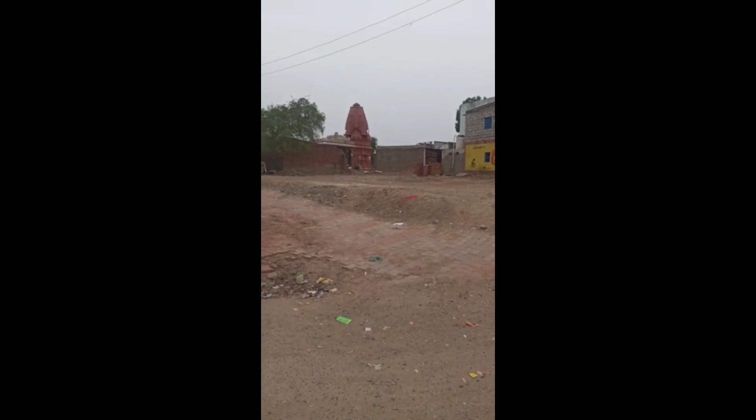We took a session for awareness about cleanliness, attracting tourism, development in the village, and also made girls aware about further education and employment.

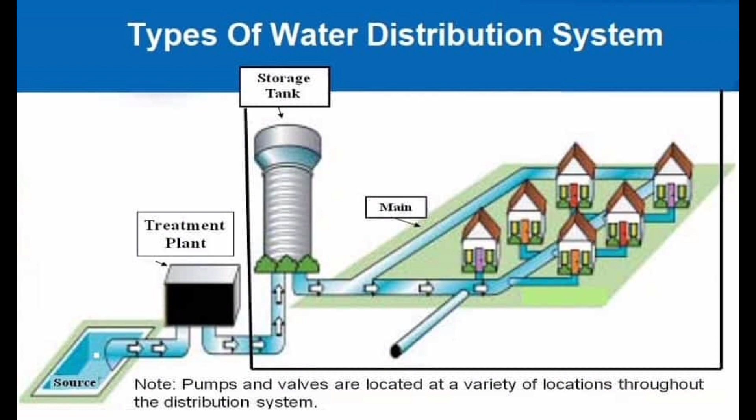Kerala needs a Wi-Fi tower for IT connectivity, speakers for better communication, and CCTV cameras for better surveillance in the village. The village needs a water distribution system since there is already an overhead water tank, and a drainage system, as villagers currently drain wastewater into the lake.

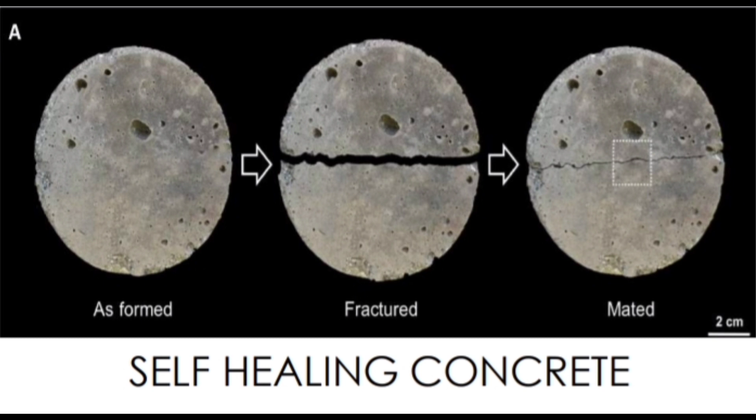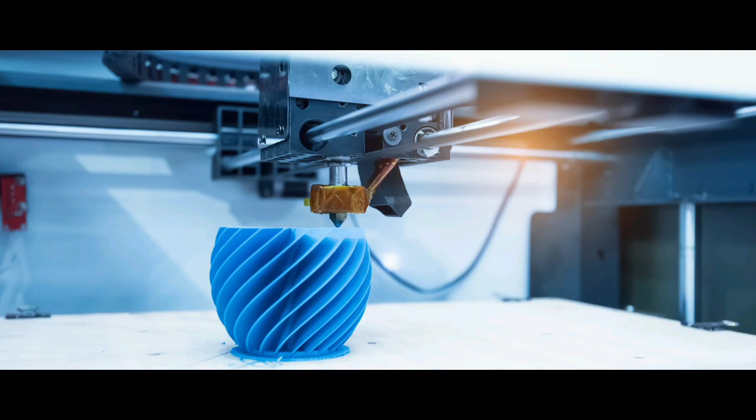Self-healing concrete for self-maintenance of structures, lake water to cool buildings by cutting 80% electricity consumption and CO2 emission, cold storage to extend food life for global food security and economic stability, and a plastic 3D printing machine to reuse plastic in a better way and cut down pollution.

Combining wind and solar energy to generate 40% more energy than ordinary rooftop panels.

We proposed a Gram Panchayat and community hall in the same building. We gave a separate room for Talati and Sarpanch, a computer room, storeroom, 2 toilets and waiting area in the Gram Panchayat, whereas we gave 2 rooms in the community hall, a common toilet and wash basin.

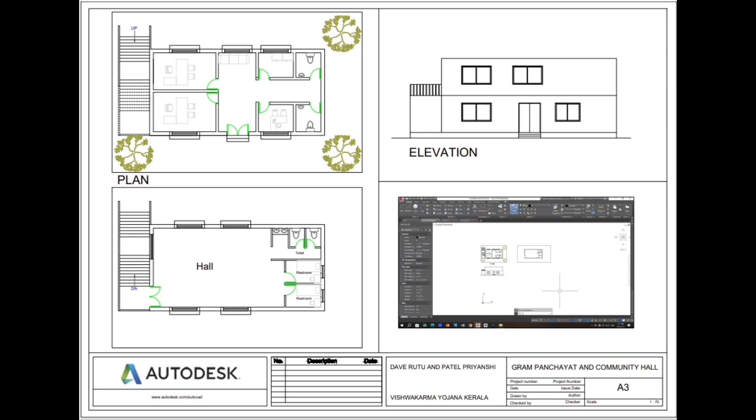This is the post office design in which we gave an office, a parcel room, toilet and waiting area, along with a letter box outside.

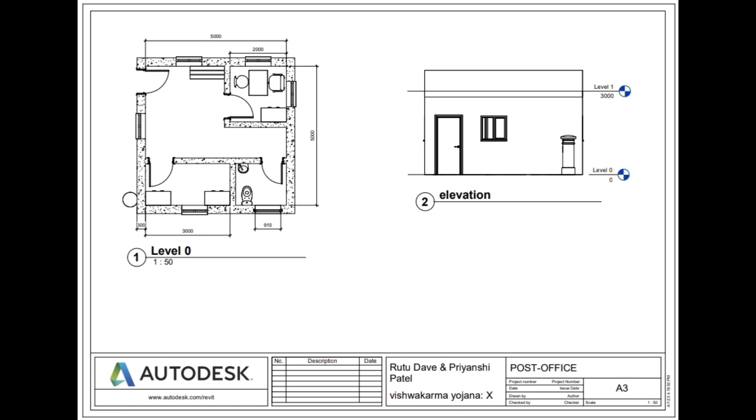This is the design of the secondary school which we decided to build in place of the old primary school. We gave a G+2 building design for the school, with 3 classrooms — 2 on the ground floor and 1 on the second floor — a staff room with principal cabin on the ground floor, a computer classroom on the first floor, 3 labs for physics, chemistry and biology — 2 on the first floor and 1 on the second floor — a public library on the second floor, and a toilet on each floor.

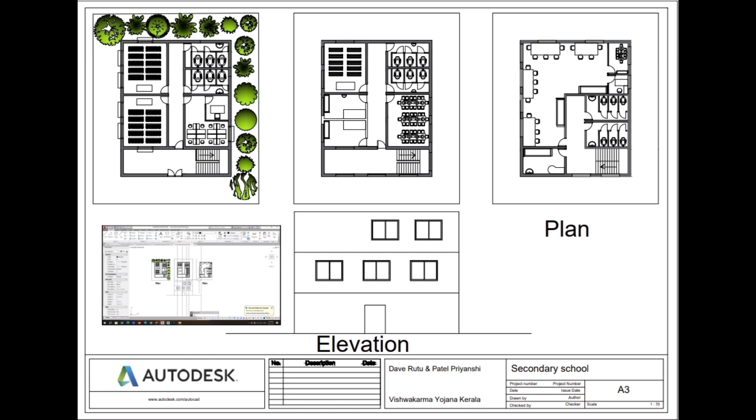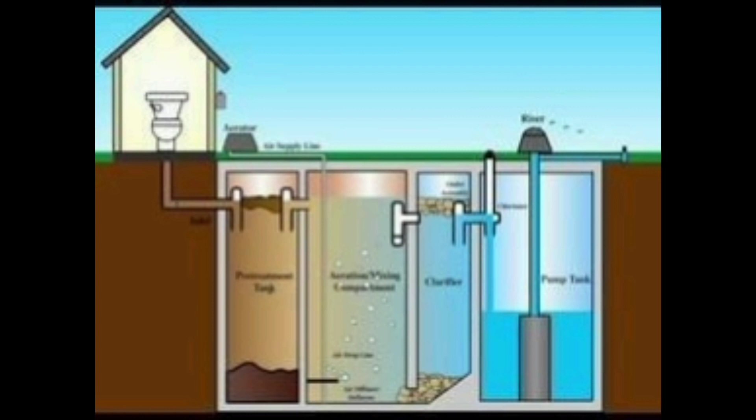This is the public toilet design in which we gave 10 toilets, 2 bathrooms and a wash basin. At last, we decided to give a septic tank in the village, as there is no wastewater treatment plant.

This is how we can develop our country by glorifying our villages and making them smart and clean by doing urbanization. Thank you.